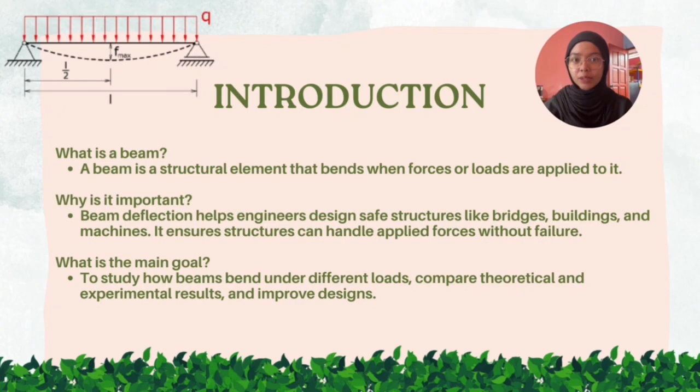wisely and improving performance. This experiment aims to study how a beam bends when forces are applied. It also compares the actual bending result with the prediction made using formulas like the Macaulay method. This helps us learn more about the relationship between force, bending and safety in structures.

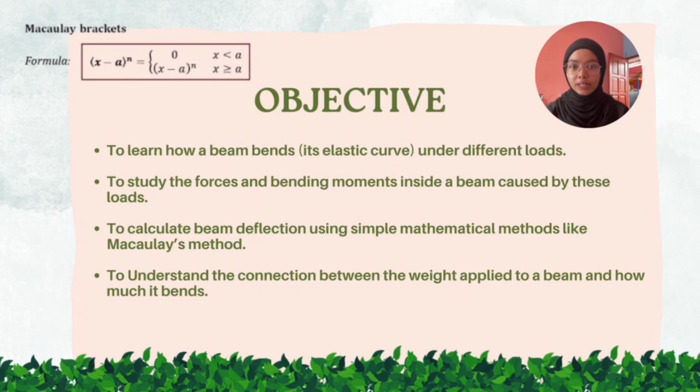Next, the main objectives of our group project are: first, to learn how a beam bends under different loads. Second, to study the forces and bending moments inside a beam caused by these loads. Third, to calculate beam deflection using simple mathematical methods like the Macaulay method. And the last one is to understand the connection between the weight applied to a beam and how much it bends.

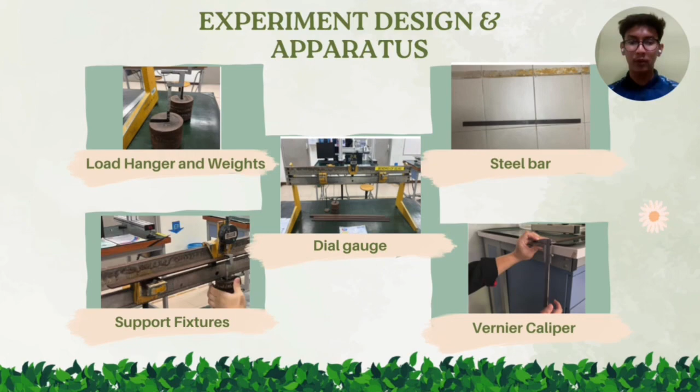So now for the load. The load was cylindrical steel weights with 10 Newton increments up to 50 Newton. The external force required to test the deflection of the beam under various circumstances was applied by these weights. Next, we go to the dial gauge. The deflection of the steel bar was precisely measured using a precision measurement tool with a 0.01 mm scale.

And next, hanger weight. This part made it easier to attach the steel weight to the test specimen, and was used to hang the load at the design location along the beam. And the last one is the vernier caliper. To ensure accurate computation of parameters like the moment of inertia, the steel bar's width and height were measured with high precision using a digital vernier caliper or a normal vernier caliper.

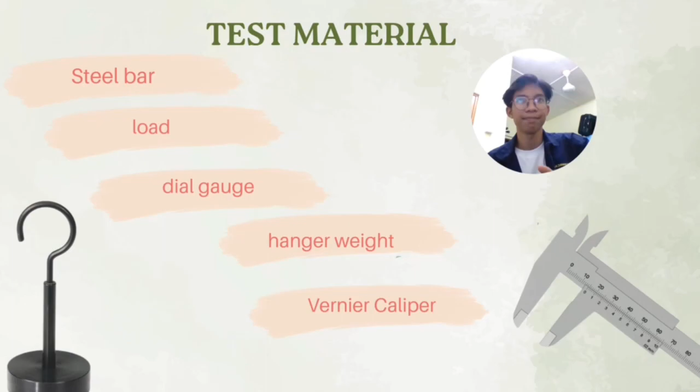Next, we go to the procedure. First, clean the surface of the beam to ensure proper adhesion of the strain gauge. And then the thickness and the width of the steel bar are measured by the vernier caliper. And then adjust the position of the two lower anvils to the end of 95 cm. Next, the beam is put on the two lower anvils, and measure from the starting point to the place of applied load, which is 50 cm. Next, the load hanger is hung 50 cm from the starting point.

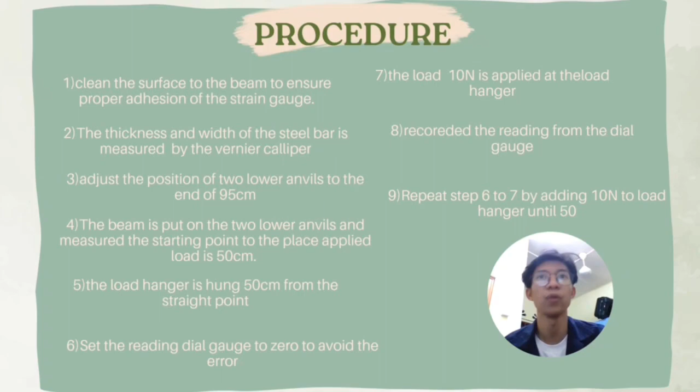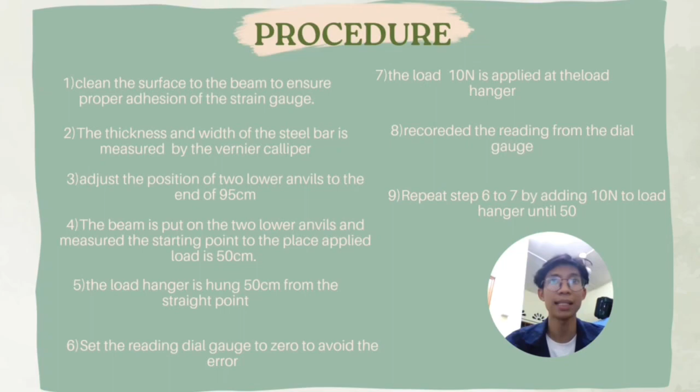Six, set the dial gauge reading to 0 to avoid error. Seven, the 10 Newton load is applied at the load hanger. Eight, record the reading from the dial gauge. And the last one is repeat steps 6 to 7 by adding 10 Newton to the load hanger until 50.

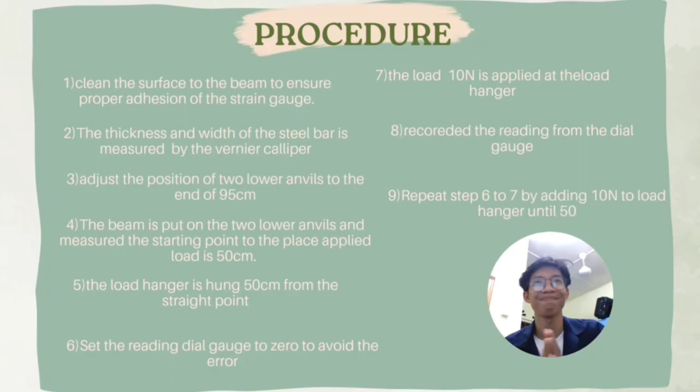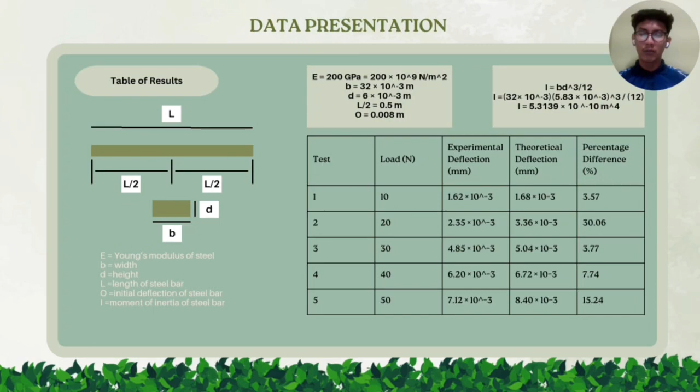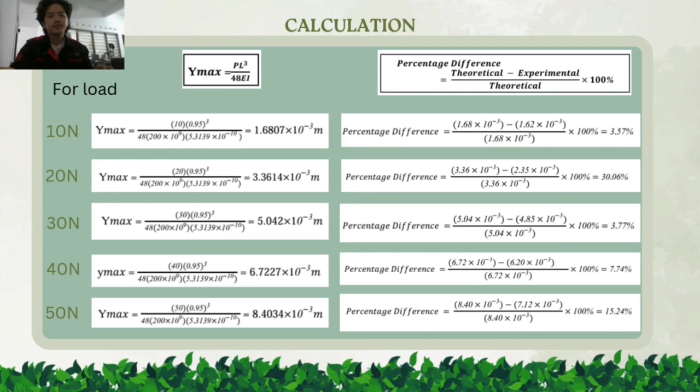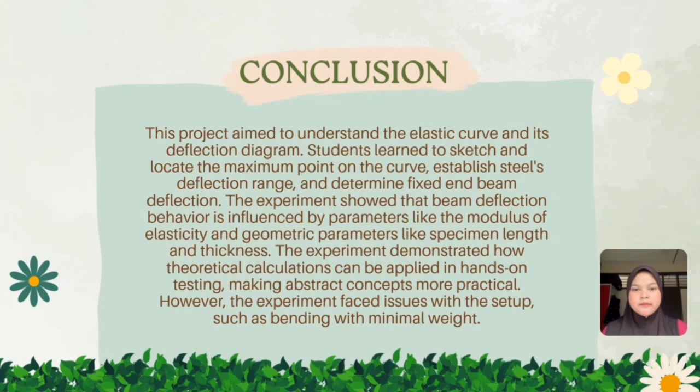The experiment demonstrates how theoretical calculation can be applied in hands-on testing, making abstract concepts more practical. However, the experiment faced issues with the setup such as bending with minimal weight. Precision and accuracy are important in scientific research. Regular calibration and maintenance of equipment ensure accurate readings and the appropriate tool range.

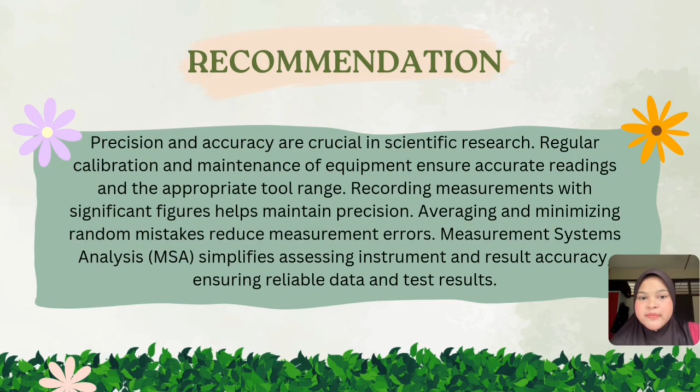Recording measurements with significant figures helps maintain precision. Averaging and minimizing random mistakes reduce measurement error. Measurement Systems Analysis (MSA) simplifies assessing instrument and result accuracy, ensuring reliable data and test results.